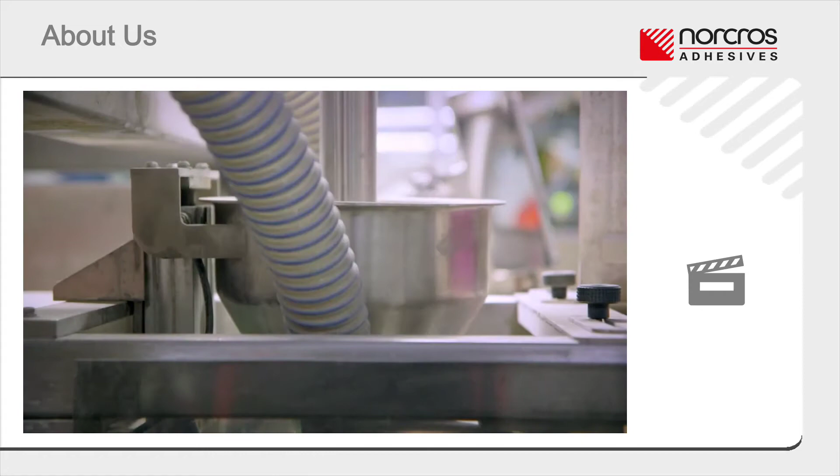This video provides a brief introduction to Norcros Adhesives. Norcros Adhesives is part of the Norcros Group, and alongside sister company Johnson Tiles, it is based at the heart of the UK ceramics industry in Stoke-on-Trent. The company is a leading British manufacturer. The product range includes branded adhesives, grouts and surface preparation products.

Quality is vital to Norcros Adhesives, so only the finest raw materials are used, along with increasing proportions of recycled materials. Strict quality control checks are performed on all incoming materials upon delivery. The modern, fully automated manufacturing and packaging plant employs lean manufacturing techniques for the high-volume production of polymer-modified powder adhesives, grouts and screeds, together with professional performance ready-mixed adhesives.

Once the products are manufactured, the extensive care doesn't stop there. Each batch is individually tested, and high-tech machinery seals and palletizes each bag. Investment in state-of-the-art machinery at all stages of the production and packaging process enables Norcros Adhesives to manufacture, package and distribute technically advanced products within very precise manufacturing parameters, and with a minimum of wastage and environmental impact.

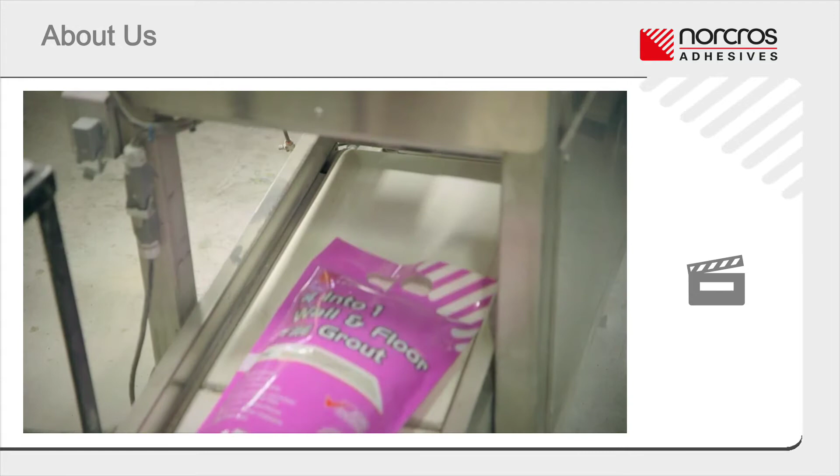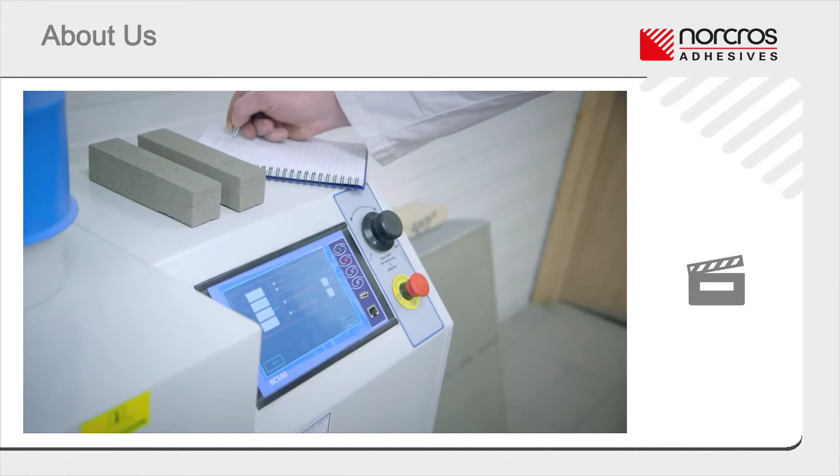Norcros Adhesives takes its environmental responsibilities seriously and is ISO 14001 accredited for reducing waste and improving resource efficiency. Norcros Adhesives continually refines and develops its product range, improving existing products and adding innovative new ones. The company's future growth comes through continued innovation and rigorous R&D to create the next generation of adhesives. This is the way Norcros Adhesives keeps one step ahead of its competitors.

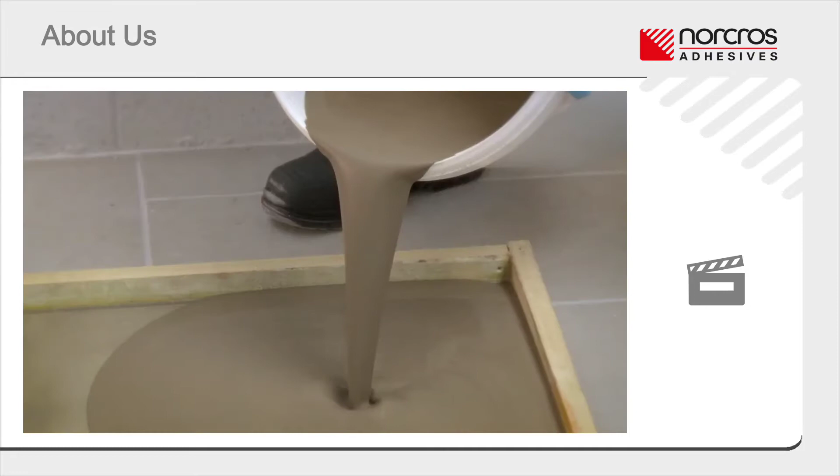The company's recent investment in a new skills centre allows for the delivery of a wide range of practical courses for tilers and retailers, giving real insight into product development and installation techniques. In this way, investment by Norcros Adhesives is benefiting the industry as a whole. The Skills Centre enables Norcros Adhesives to deliver RIBA-accredited CPD courses, which are a welcome resource for architects, helping to drive up product knowledge and technical expertise within the industry. As well as theoretical training, students also get the chance to try out practical skills that they have learned.

Exceptional training support is at the heart of the Norcros Job Done ethos. The Technical Helpline is a one-stop resource for advice and support on products, system installation and more. Site visits, technical reports and remedial advice are always available. All Norcros products come with a lifetime guarantee. It's the company's promise to the industry. It all adds up to a success story in manufacturing, sales and distribution for Norcros Adhesives. It is the one-stop shop for high-quality, British-made products.

Rock-Tight Exterior System. The Rock-Tight system is a three-part system for fixing increasingly popular 20mm external porcelain and stone tiles. Norcros Rock-Tight Exterior Porcelain and Stone System comprises a primer, a mortar or alternative mortar additive option, and a brush-in grout. It is designed for use by landscapers and garden designers, as well as tile fixers. This is where internal tiled space is being extended to terrace or patio areas outside a building, which is part of a long-term lifestyle trend to enhance living areas by making better use of external space.

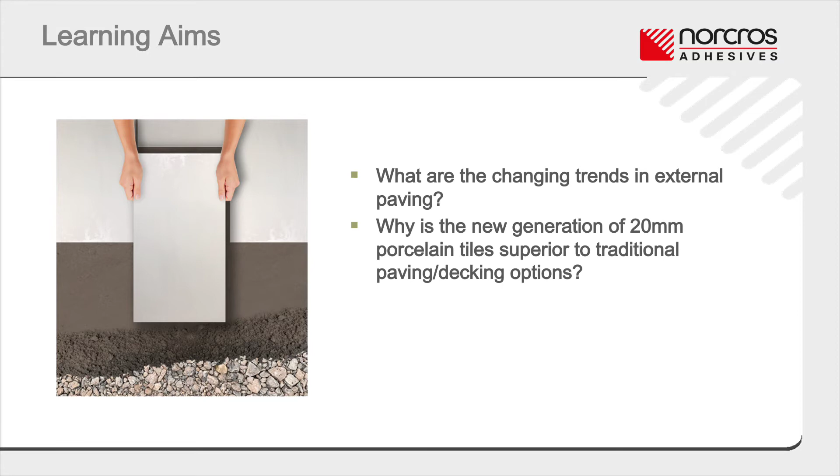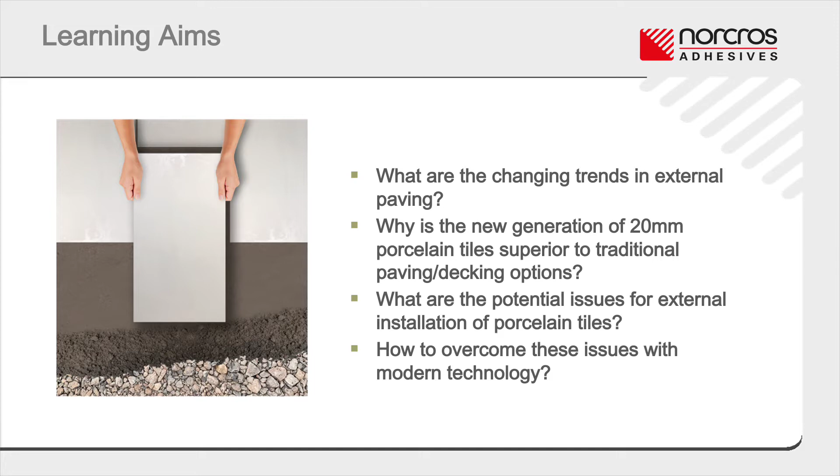In today's CPD, we aim to cover these learning objectives. What are the changing trends in external paving? Why is the new generation of 20mm porcelain tiles superior to traditional paving or decking options? What are the potential issues for external installation of porcelain tiles? And how to overcome these issues with modern technology or tiling systems.

Section 1. External tiling trends. In this section, we will review the current key trends in external tiling. Changing trends of external tiling. Gardens and outdoor spaces are increasingly becoming an extension of an indoor space.

A survey performed by the Royal Institution of Chartered Surveyors in May 2020 showed that 81% of British real estate agents expect there to be an increase in desire for properties with gardens or balconies over the next 2 years. Lifestyle changes following the coronavirus lockdown measures introduced in March 2020 have also increased the demand for properties with larger outdoor areas.

A recent key trend in the tiling market is the extension of internal tiled space to terrace or patio areas outside a building. This is part of a long-term lifestyle trend to enhance living areas by making better use of external space. The introduction of 20mm external porcelain tiles keeps in line with this trend, allowing similar tiles to be used both inside and outside, creating a seamless transition from internal to external living space in and around the home.

Traditional outdoor areas. Traditionally, outdoor areas may be covered with concrete pavers or timber decking. The use of timber decking is going out of fashion as it can quickly look tired. When wet, due to rain or frost, decking can become extremely slippery, which could become a health and safety hazard.

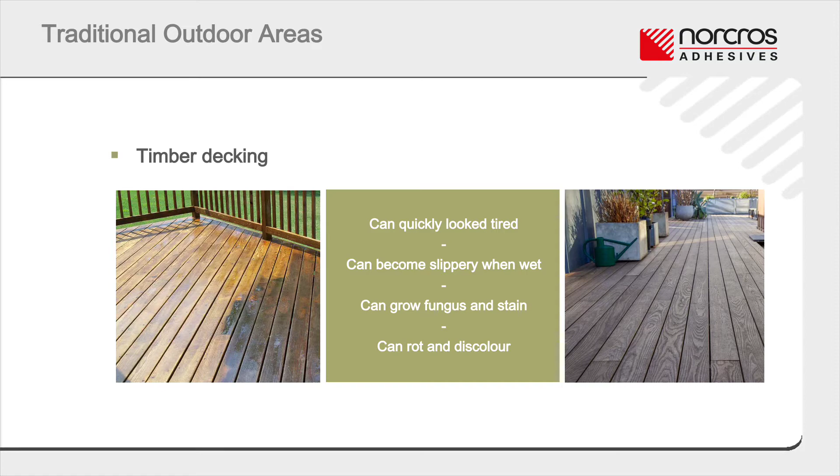Continuously wet decking can cause the growth of fungus, and the tannin in the timber can react to form a black stain. The resultant stained decking requires cleaning to remove any black mold or discoloration. If the decking is constantly exposed to wet conditions, the timber can rot, which will require maintenance to fix and may even require repair. The surface of the decking can also be damaged by ultraviolet light, which can reduce its life.

Concrete pavers are capable of withstanding large amounts of weight, are durable, and last a long time. However, disadvantages include aesthetics, cleaning, and maintenance. Weeds can grow in the cracks between the tiles, and the roots of the weeds can cause the slabs to move. Due to the color of concrete paving, it is often considered a dull option with not many design opportunities.

Concrete is also susceptible to staining by organic matter such as mold or moss. It requires relatively high amounts of cleaning and maintenance to keep the pavers looking in their best condition. In summary, both concrete paving and timber decking require high amounts of cleaning and maintenance to keep them in their best condition.

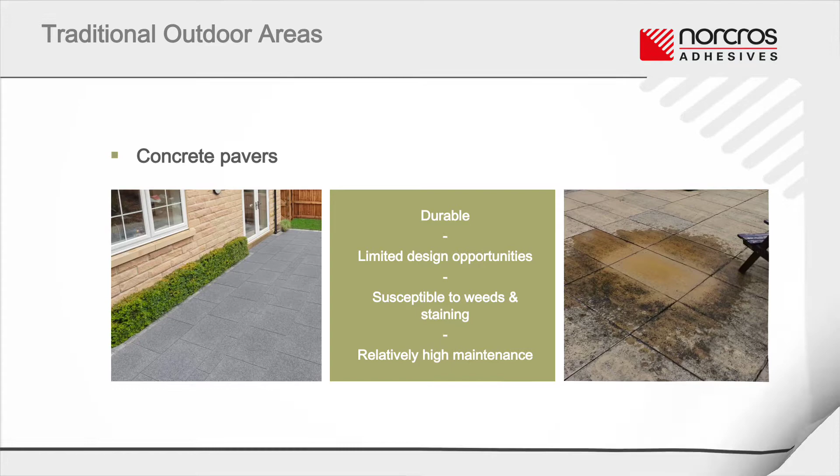Tiles and stone for outdoor areas. Tiles and stone can make outdoor space look smart and attractive. Just as inside your home, you can opt for man-made tiles or real stone versions for the exterior. Natural stone is generally the more expensive option. It provides a natural finish, as each tile is unique and has an inherent pattern and color variations.

Man-made tiles such as porcelain are becoming increasingly popular. For example, porcelain provides a much more contemporary and clean look than traditional concrete or stone slabs. With the advances in print technology and 3D textured surfaces, it's hard to tell the wood or stone effects of porcelain tiles from their naturally occurring counterparts.

They can create either a pleasing neutral surface or patterned designs using geometric patterns, hexagons, and mosaic effects. Porcelain tiles and stone, appropriate for both indoor and outdoor areas, can create a continuous surface, for example from a kitchen or conservatory with sliding doors, extending to a patio area in the garden.

Section 2. 20mm porcelain tiles. In this section, we will look at the features of 20mm thick porcelain tiles in more detail and their applications. What are porcelain tiles? Porcelain is a type of ceramic. The major difference between porcelain tile and ceramic tile is how it's made. Both tiles are made from a clay mixture that's fired in a kiln.

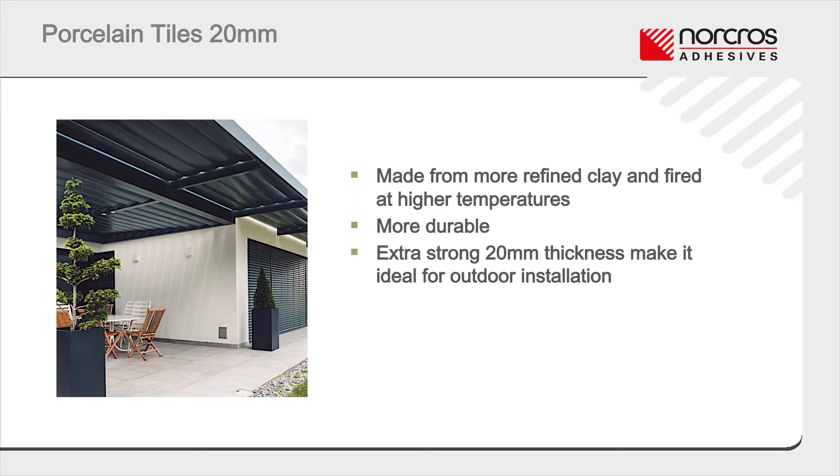Key features: 20 mm porcelain tiles are ideal for external use. The 20 mm thickness increases the strength of the tiles, making them resistant to heavy loads, stresses and thermal shock, which could damage outdoor tiles between 9 mm and 12 mm thickness.

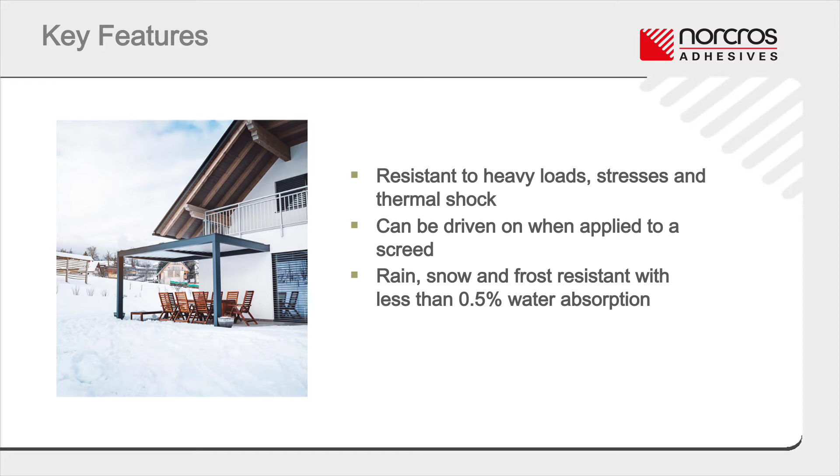Porcelain tiles are moisture resistant, meaning that they absorb very little water. However, if submerged in water long enough, a small amount of water will be absorbed into the tile body. The British standard definition of a porcelain tile is a ceramic fully vitrified tile with water absorption of 0.5% or less. It is important that tiles intended for external use have low water absorption, as they will be exposed to rain, snow and frost, which could have an adverse effect on more porous-bodied tiles. It also minimizes any damage that may be caused by the use of cleaning or de-icing chemicals.

Porcelain tiles are not affected by ultraviolet rays, meaning that there is none of the aesthetic damage or discoloration generally seen on timber decking. Even when it is exposed to direct sunlight, no color fading occurs. Porcelain tiles are one of the easiest floor coverings to maintain, primarily as their moisture-resistant characteristics make them difficult to stain. The process of cleaning generally begins with dusting or vacuum cleaning to remove any debris. In the case of external tiles, this may be pebbles, leaves, or other organic matter.

In general, porcelain tiles tend to be more expensive than ceramic tiles. However, this cost is outweighed by the fact that they are hard-wearing and have a higher durability than the more porous ceramic-bodied tiles. They are easy to maintain and suitable for both internal and external use. The higher porosity of ceramic tiles means that they are more suitable for use indoors. If porcelain tiles are installed, maintained and treated correctly, it is estimated that they have a lifespan of around 50 years in a residential setting.

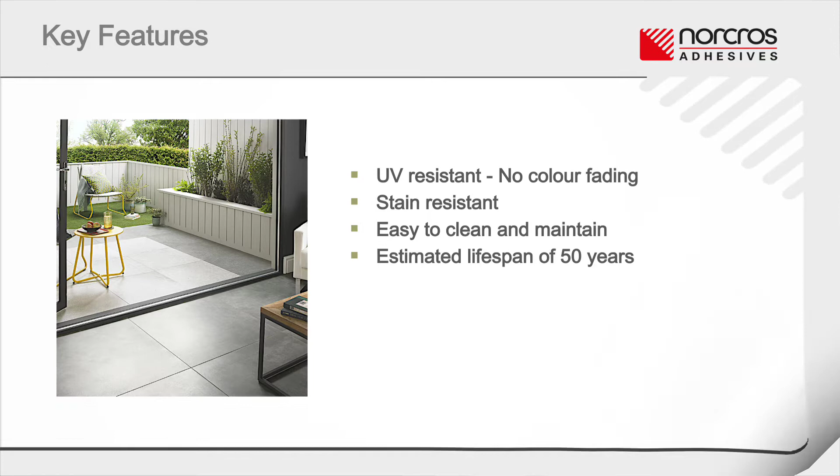Sustainability. Porcelain has an extended life compared to other alternatives mentioned, including ceramic. Responsible manufacturers respond and work towards net zero and/or carbon neutral targets. In the life of a porcelain tile, the main energy consumed is in the kiln for the process, of approximately 15 to 20 minutes. However, the tile often outlives the building in which it is installed, with a minimum average life of 50 years in Europe and 70 years in the USA. At the end of life, the product is totally inorganic and therefore does not release any carbon dioxide back into the environment. The porcelain tiles can be recycled as an inert material. It is worth noting that tiles and stone are not flammable materials.

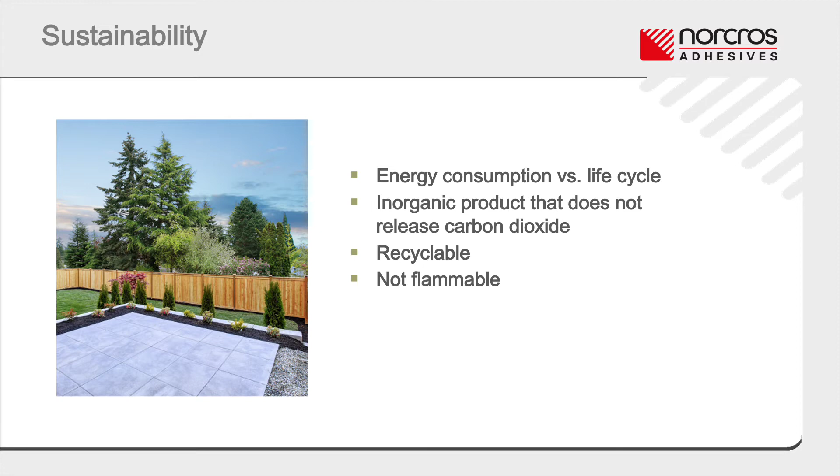Slip resistance. It is important that tiles designed for outdoor use have excellent slip resistance characteristics in order to prevent a slip accident from occurring, as the likelihood of them getting wet is inevitable. The pendulum test is HSE's preferred method of slip resistance test in the UK because it is accurate, portable and works in the conditions that slip accidents happen. It is also recommended by the UK Slip Resistance Group. This test measures dynamic coefficient of friction. It is designed to replicate a pedestrian heel strike, the point at which most slips occur. It works in wet and dry conditions.

Based on recommendations from the HSE, you should use floor finishes that achieve a pendulum 4S slider 96 of 36+ for shod foot areas, and/or a pendulum TRL slider 55 of 36+ for wet barefoot areas to achieve a low slip environment. As good practice, it is recommended for external floor areas to use a tile with pendulum 4S slider 96 of 40+ and pendulum TRL slider 55 of 40+ for wet barefoot areas due to potential slight variation from tile to tile and possible cleaning and maintenance regimes.

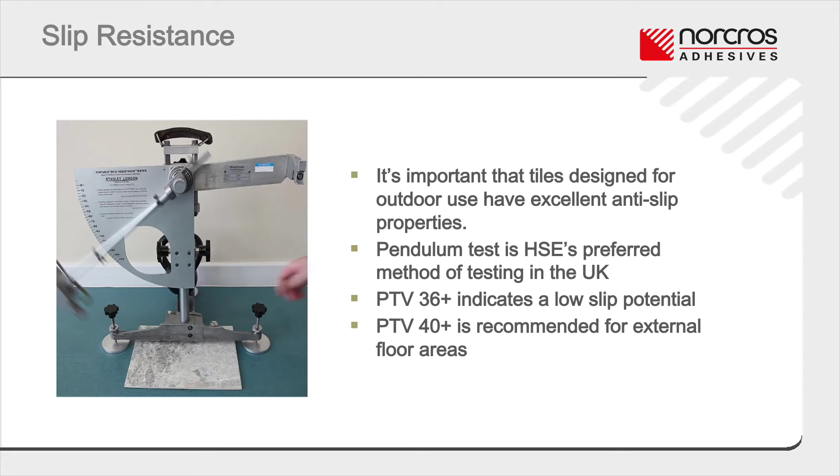Applications. 20 mm thick porcelain tiles combine versatile aesthetics with outstanding technical performance and stylistic continuity. They are suitable for many applications and can be laid both dry on grass, gravel, in raised floors, and with adhesive for the outdoor flooring of public and residential areas. The high tensile strength of porcelain tiles makes them suitable for vehicle transit when fixed onto a screed. Residential areas. The garden does not have to be considered as something completely detached from the rest of the house. A stylistic continuity between the inside and the outside can be created using 20 mm porcelain tiles. Outdoor areas such as balconies, terraces, verandas or garden walkways can be designed to match the indoor flooring.

Public areas. 20 mm thick tiles are particularly suitable for outdoor floorings in urban areas, shopping malls, squares, pavements, walkways, parking lots, public green areas and meeting points. Poolsides and seaside resorts. 20 mm porcelain tiles can provide sufficient slip resistance to avoid accidents connected to walking on a slippery smooth floor with wet feet, and at the same time be resistant to water and other moisture, as well as the chemicals used to clean the pool water. They are the perfect solution to complete the external architecture of luxurious dwellings, wellness centers, and seaside resorts.

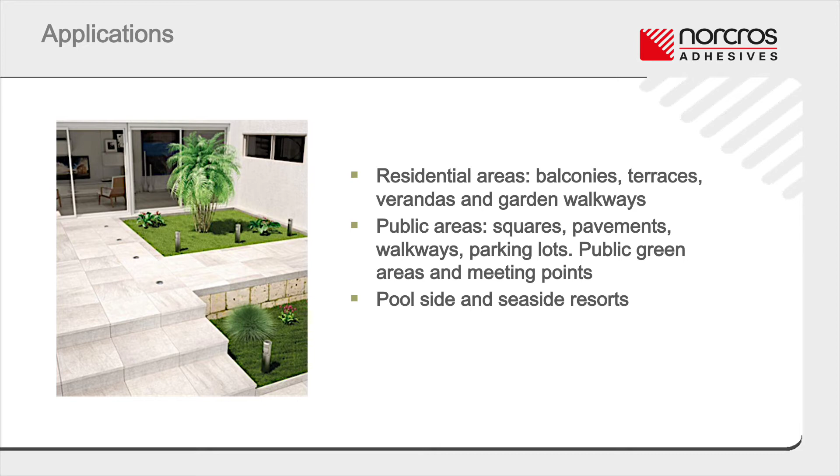Section 3. Potential issues and considerations. So far, we have explored the key benefits of the new generation of 20 mm porcelain and stone tiles, one of which is the design potential of creating a seamless transition from internal to external space. We will now review the potential issues and general considerations related to the external installation of 20 mm porcelain tiles.

Relevant standards. It is important to follow the relevant recommendations in the British standards when installing 20 mm porcelain tiles. BS 5385 Part 3, 2014. Wall and floor tiling. Design and installation of internal and external ceramic and mosaic floor tiling in normal conditions. Code of Practice. BS 5385 Part 4, 2015. Wall and floor tiling. Design and installation of ceramic and mosaic tiling in specific conditions.

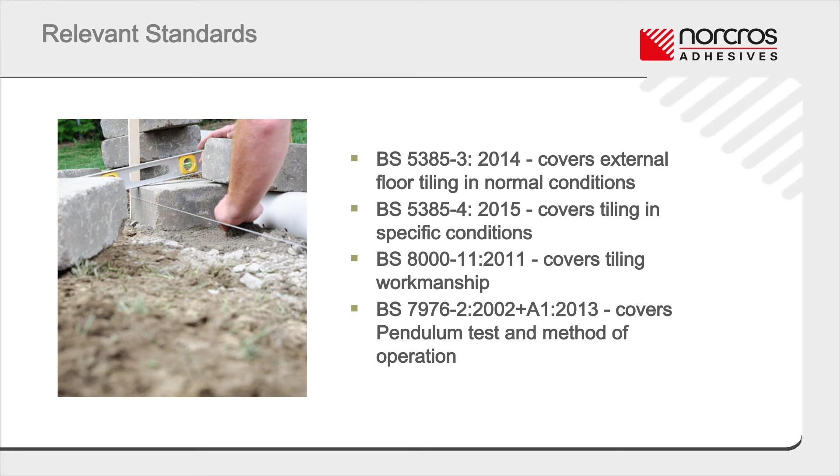Potential issues. One of the potential problems with external installation of 20 mm porcelain tiles is that they are often installed by builders or landscapers who may have limited experience or access to guidance about working with tiles. There are multiple differences between installing concrete pavers and installing porcelain tiles; however, installers are not always aware of this. Incorrect installation can lead to problems in the future, such as tile movement or cracking, requiring replacement or repair.

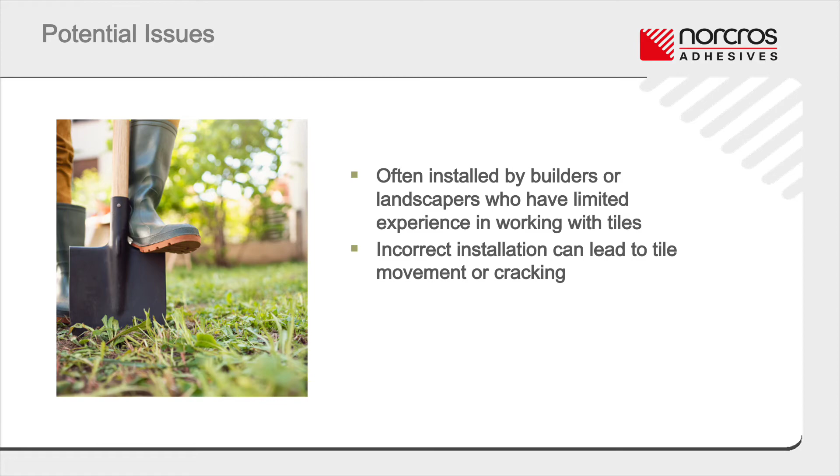As with all types of tiles and slabs, water can enter through grout joints and travel through the capillaries in the cement, where it sits at the lowest point. Once the temperature increases, the water is released as a vapor, which permeates through the various layers. Some of this water vapor is forced against an impervious tile, for example porcelain, and therefore may not escape. The water becomes trapped until the saturation point is reached. The more water that is trapped, the greater the risk of damage to the tiling assembly.

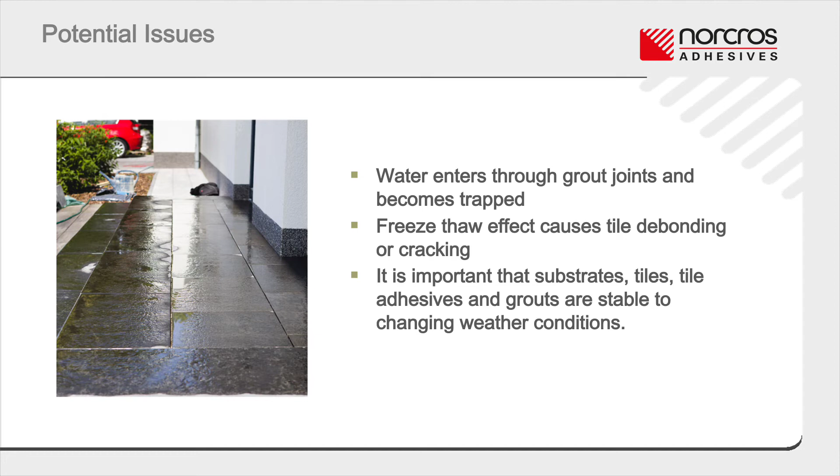When voids form, water can become trapped, and during cooler periods the process of freeze-thaw can occur. This can lead to the screed becoming unstable. It is important that backgrounds, tiles, tile adhesives and grouts are stable to changing weather conditions, thermal fluctuations, water penetration and frost.

The impervious nature of porcelain tiles can make it difficult for the mortar to bond with the tile. The low water absorption value of porcelain is an advantage in many ways. However, it also means that the tiles will struggle to absorb the adhesive material, which can make the tiles more difficult to install. This can affect the bond between the tiles and the surface, and can result in issues such as unstable tiles, movement, or cracking. In order to prevent this, it is therefore important to use a suitable primer to aid adhesion.

General considerations. When tiling externally, it is important to ensure that adequate drainage is in place and appropriate falls in the screed are provided for the drainage of water. If falls are not correctly provided, puddles of water may form across the installation. Any falls should be directed away from the building, and there must be waterproofing at the junction with the property.

BS 5385 Part 3 advises that gradients of between 1 in 80 and 1 in 35 are appropriate for traditional systems. However, the precise fall should be determined by the conditions of different areas, manufacturer's guidance, and the volume of water that should be removed. It is important that falls are not created in the tile finish, but that the tile finish follows the existing falls. Inadequate drainage and trapped water can cause material breakdown, instability, and eventually failure of the installation.

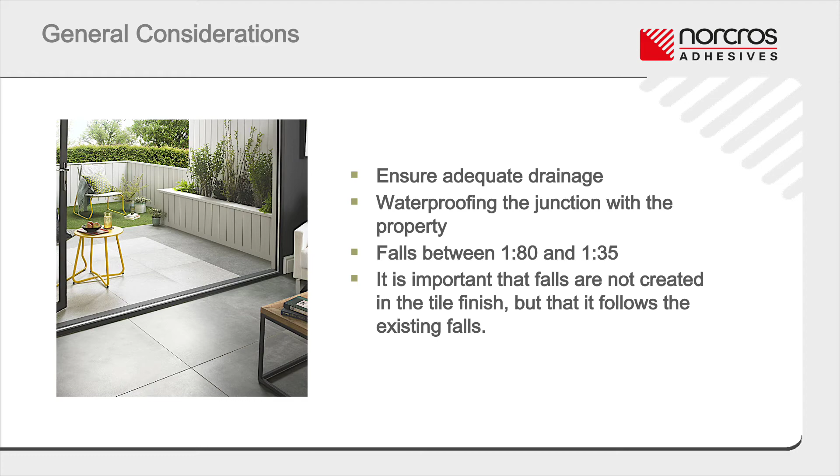At the design stage, it is important to make provision for movement joints. The various components that form a tiled installation, background, adhesive and tiles, all have unique physical characteristics that affect their behavior and cause them to expand and contract at different rates when subjected to things such as moisture, changes in temperature, and loading. This differential movement causes movement stress within the tiled installation, which can lead to failures such as grout or tiles cracking and tiles loosening and debonding.

In accordance with British Standard BS 5385 Part 3 2014, for larger external floor areas, intermediate movement joints should be provided to form bays of size less than 10 meters by 10 meters.

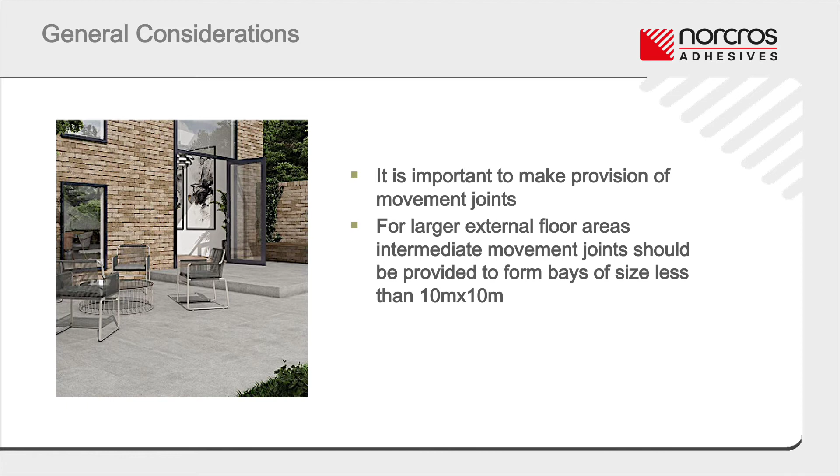Section 4. A three-step installation solution. Innovative technology has enabled a three-step installation solution for use by anyone who wants to create a seamless transition from internal to external living space in and around the home, whilst ensuring both safety and longevity of the installation.

Simple three-step installation. The easy-to-use three-step system comprises firstly a porcelain primer, a fibre-reinforced, polymer-modified cement-based primer, designed to improve adhesion when used with porcelain and stone pavers. Secondly, a high-strength fibre-reinforced mortar. Finally, the system includes a ready-to-use brush-in grout. It is air-curing and available in a range of colours. Before the introduction of this three-step installation system, it's important to look at the surface preparation.

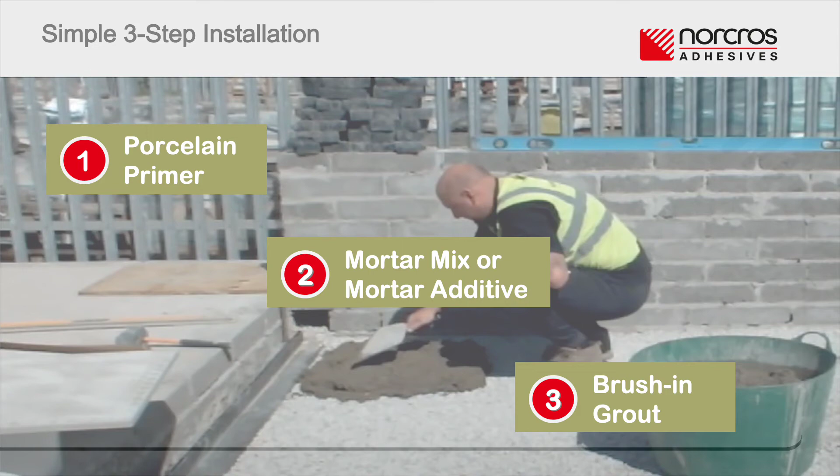Surface preparation. Before tiling, the external area should be dug out to ensure that it is stable. The area should be deep enough to allow for a compacted hardcore depth of 100 mm to 150 mm for porcelain tiles. A fall should then be created by setting out the area to be tiled using a horizontal level line and a second sloped line to create a fall.

The area should fall away from any property at a ratio of 25 mm over a 1.5 meter length. Alternatively, a drainage channel should be installed. To ensure rigidity and stability, compact Type 1 or MOT grade hardcore should be used.

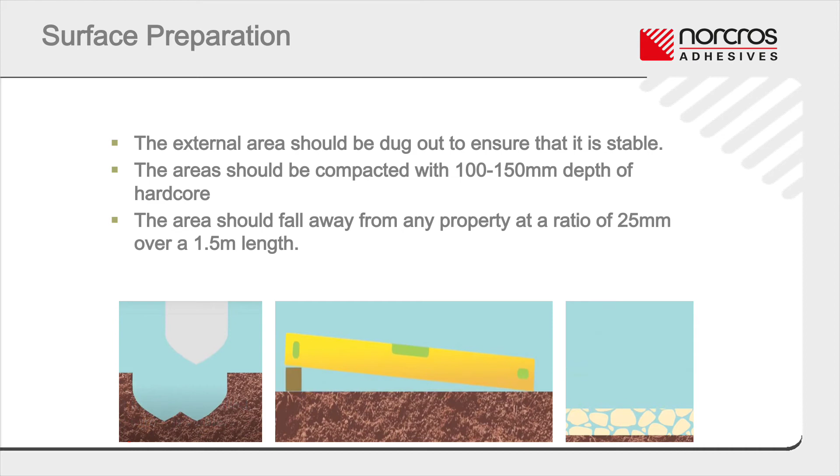The general benefits are that it creates a strong bond to the porcelain tile body, provides a strong key for the mortar to bond to, and has a long open time of 60 minutes between 3 and 20 centigrade. It's also very simple to use. You just mix it with water.

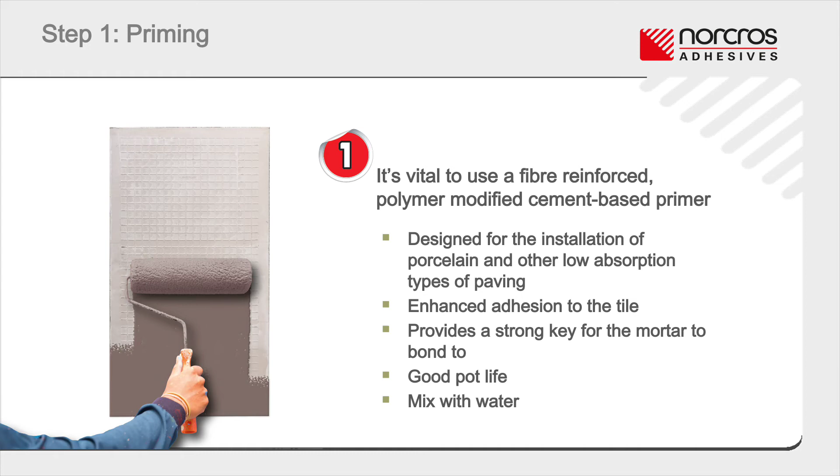The mortar only requires the addition of water and contains the specially designed additives to improve performance, workability and freeze-thaw resistance of the mortar mix. Further advice on the adhesive suitability and product specification should always be obtained from the adhesive manufacturer.

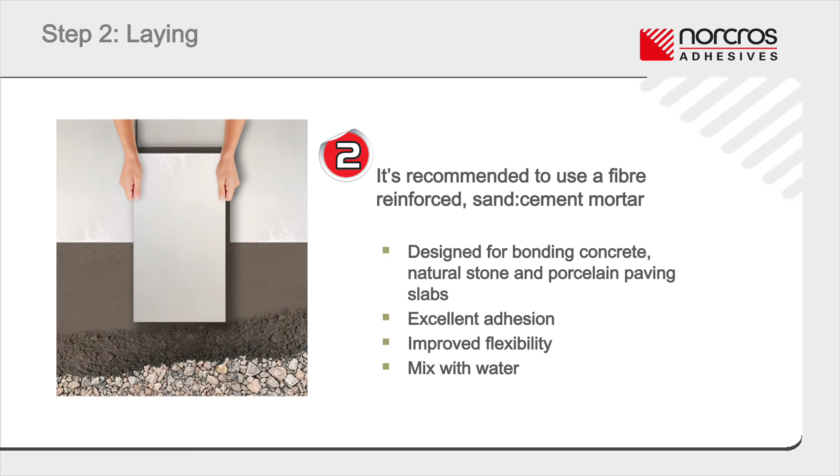Step 3. Grouting. Traditionally, a dry mixture of sand and cement mix was brushed in between tiles to act as a grout. For this technique, the surface of the tiles had to be completely dry, as any dampness would cause the mixture to stick to the surface of the tiles, and likely cause a stain. As the mixture is so lightweight, there are often issues with the sand not effectively filling the grout joint, allowing weeds to grow in between the gaps.

For grouting, it is recommended to use a cement-free, brush-in permeable jointing compound designed for filling joints from 3 mm wide between concrete, natural stone and porcelain paving slabs. Such a permeable jointing compound is designed for filling joints from 3 mm wide between porcelain paving slabs. It is easy to use and can be brushed into the joints.

It is air-drying and long-lasting, and is able to be applied in most weather conditions, down to a temperature of 3 degrees Celsius. The product should not be applied in heavy rain, as the curing process will be extended and may result in an uneven surface texture when the grout is cured.

Before use, it is important that the ground is free-draining and that the sub-base is permeable. As the grout is air-drying, joint failure will occur if the sub-base is subject to continuous wetting. It is also important that falls are incorporated to allow the water to drain away. With porcelain tiles, it is important that a joint width of no less than 3 mm and a depth of no less than 25 mm is maintained throughout the installation.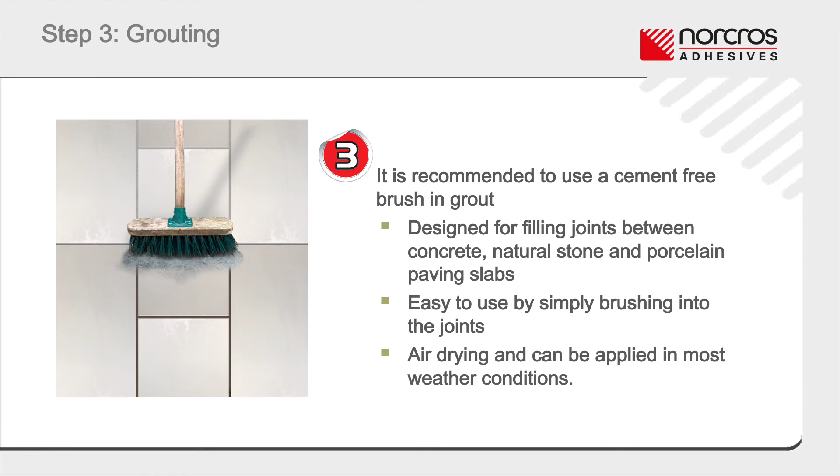System Guarantee. The use of the 3-step system enables simple installation for anyone who wants to create a seamless transition from internal to external living space in and around the home. These systems are popular with tile fixers who are laying external porcelain tiles, as well as builders and landscapers, providing an easy way to lay the tiles to those who may not be familiar with the requirements of laying this

particular type of tile. This allows home designers to come up with durable and effective solutions for working with the new generation of 20 mm porcelain tiles, ensuring that the jobs are completed on trend, in accordance with the current fashions, and also to the appropriate technical guidance.

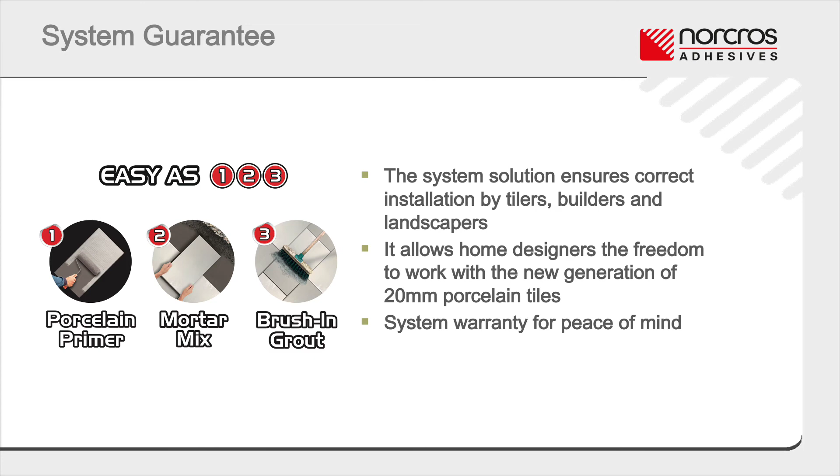The ease of installation allows home designers to create increasingly modern designs with porcelain tiles in line with the current trends. It is recommended to adopt a system solution, as manufacturers offer a warranty for the whole installation.

Direct fixing best practice. It is essential that all types of paving slab are laid onto a full bed of the mortar. Spot bedding or dot and dab fixing is not recommended, as voids beneath the slabs are points of weakness. The correct trowel should be used.

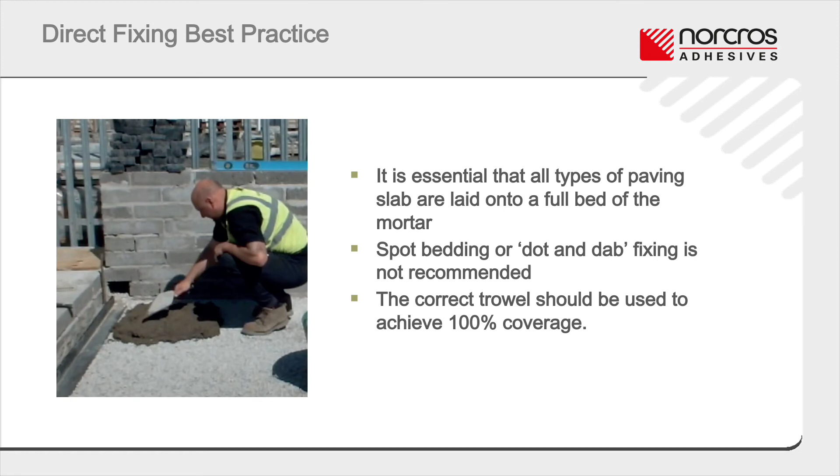When used correctly, the adhesive transferred and the pattern created should ensure 100% coverage when the tile is compressed into the adhesive. A solid bed of mortar, thickness no less than 25 mm, may be used onto hardcore which is not less than 100 mm deep. This video demonstrates the typical process of laying 20 mm porcelain tiles onto hardcore.

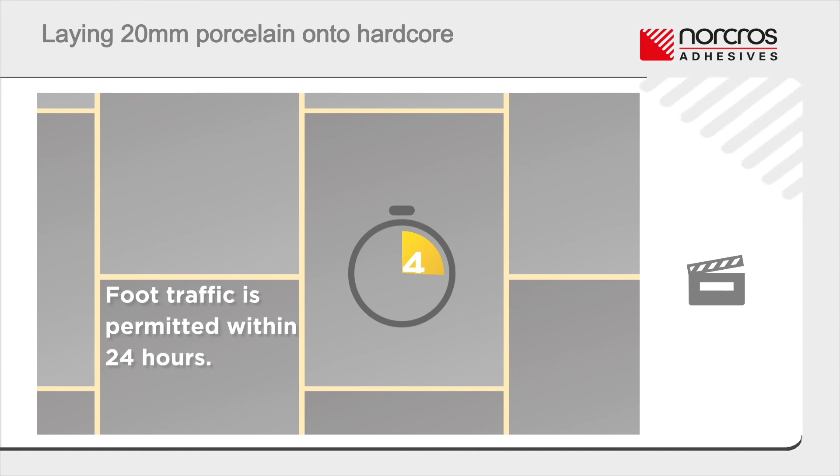Cleaning and maintenance. Porcelain tiles are one of the easiest floor coverings to maintain, primarily as their moisture-resistant characteristics make them difficult to stain. In the case of external tiles, this may be the removal of leaves, pebbles, or other organic matter. There is no need for bleach or any other harsh chemicals to be used in a general clean.

Warm water can be used to clean the tiles, with the addition of a mild detergent, such as washing up liquid if necessary. This soapy water solution can be used with a brush to remove any dirt or residue present on the tiles. It is not recommended to use a brush with hard bristles in case of scratching to the surface.

Porcelain tiles require cleaning around once or twice a year, but may require additional cleaning depending on their location. For example, if situated under a tree, frequent brushing may be necessary. Harsh chemicals such as bleach should be avoided, as the continued use of corrosives can begin to erode the surface layer of the tiles, which can negatively affect the water absorption of the tile by damaging the glaze.

If there are stains present from algae, more intensive cleaning solutions may be required. If any additional chemicals are used, it is recommended to test a small amount of chemical on an inconspicuous area first to ensure no damage will be caused. Follow tile manufacturer's advice on cleaning and maintenance options.

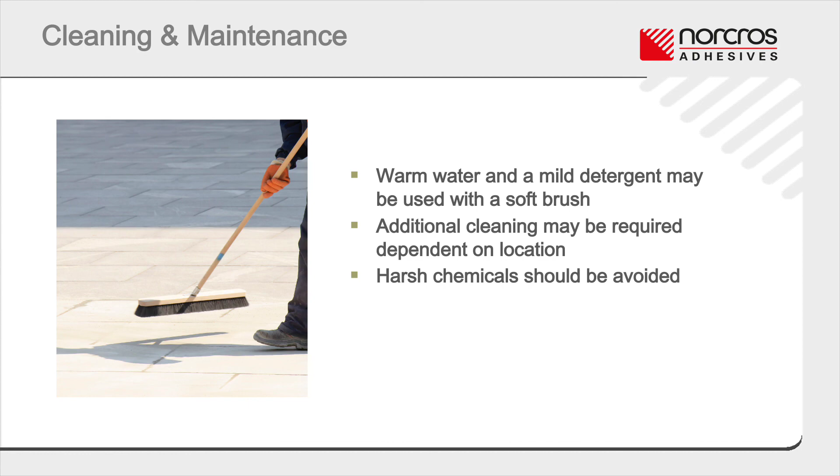Learning outcomes. Throughout the CPD, we hope that you have developed an understanding of the following key points. The new generation of 20mm porcelain tiles offer versatile design potential and excellent performance for external tiling over traditional concrete pavers and timber decking. The potential issues with installing porcelain tiles and stone externally can be overcome with proper considerations and a system installation solution.

A 3-step installation system can make the external installation of porcelain tiles and stone an easy and failure-proof process. What the performance features are of the products purposely designed for laying porcelain tiles and stone onto hardcore. We hope you should by now have improved confidence in choosing the appropriate fixing products and optimum system solutions to overcome the challenges.